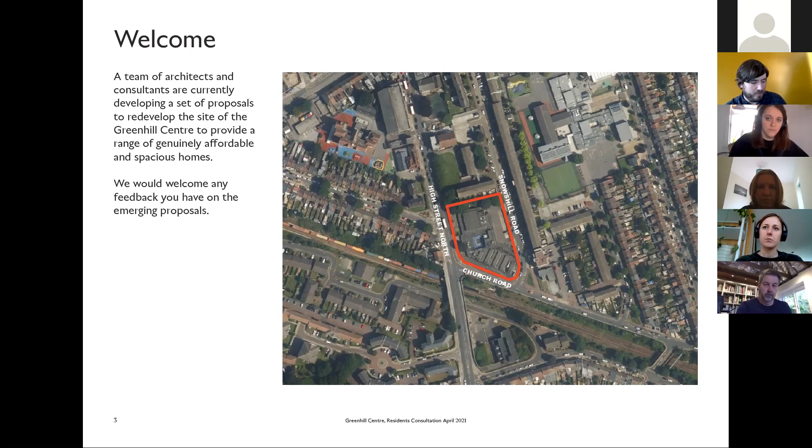Before I pass you over to Harriet, I'd like to explain the wider team. It's a Newham Council-led scheme, and I'm an employee of Newham Council. The architects are Haworth Tompkins, the landscape studio is ME Landscapes, and not present today are structural engineers, Graphic Structures, helping us with the design of the scheme, and mechanical engineers, Max Fordham.

The scheme will be a low energy passive house design building. Max Fordham are helping us design that, and Potter Raper will be providing project management and cost consultancy advice through the project. I'm going to pass you over to Harriet and Laura from Haworth Tompkins, who will take you through the design of the project.

Thanks, James. So as we've mentioned, Harriet and I are from Haworth Tompkins Architects. We're an architecture practice based in North London. We work across many sectors, including the theatre and performance sector, education buildings, and also residential buildings for both housing associations and private developers.

This example here shows one of our projects for Peabody in West London. It's a brick building which knits itself into the surrounding context. It has a mixture of inset and projecting balconies, and it ranges in height from 4 stories in some places up to 9 stories. We think this is a really good example of a project we've delivered, and the type of architectural quality and brick detailing that we hope to bring to this scheme at the Greenhill Centre.

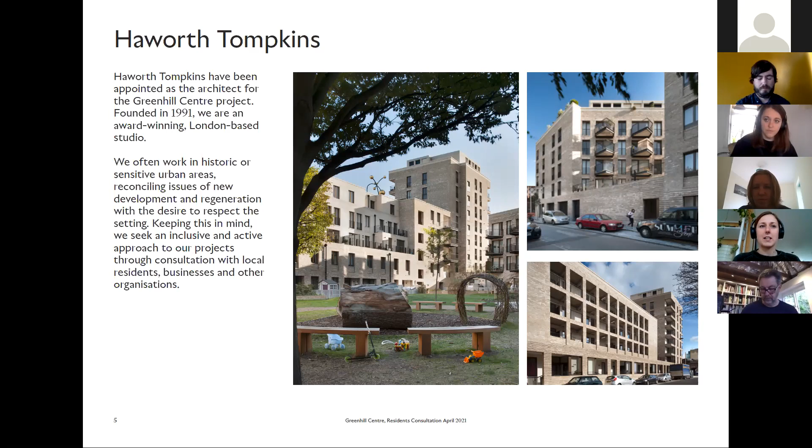Hi, I'm just going to run you through the site and our proposals. I'm assuming the majority of you know this, but the site's located just south of Manor Park Underground Station, and there's also Woodgrange Park Overground Station to the west of the site, and also a number of bus stops along High Street North and Romford Road.

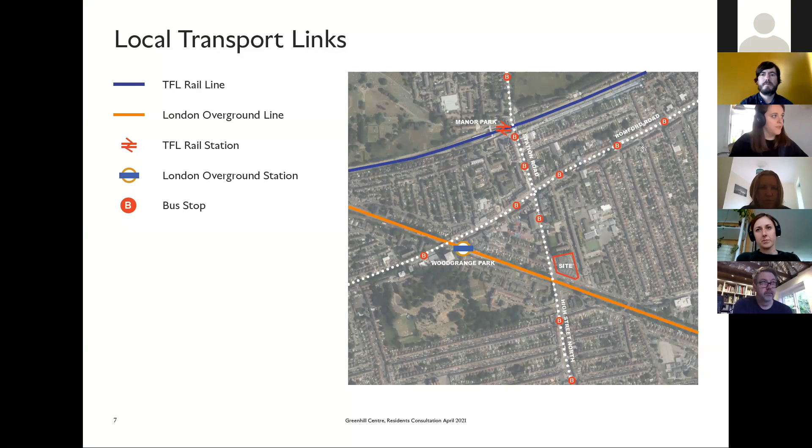The site today, as James mentioned, has the existing Greenhill Centre on it, which has a number of functions: the gym, the boxing club, GP surgery. James has explained that the GP surgery and the boxing club are being re-provided off-site, and we are re-providing the gym within our proposal.

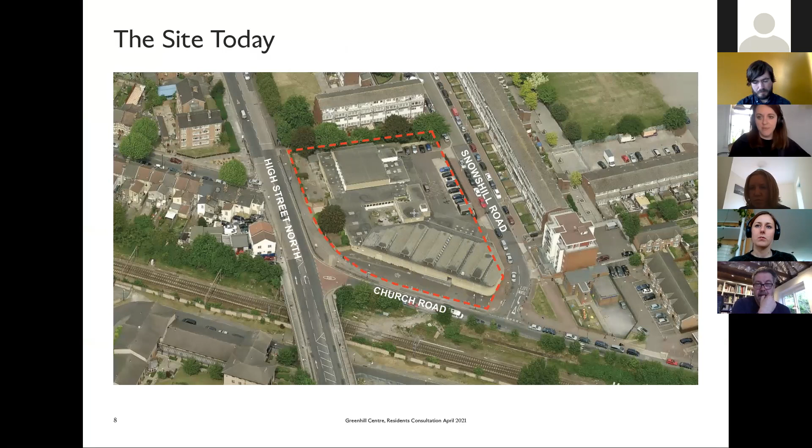The site's bounded by 3 quite different roads. First we have High Street North, which has a number of locally listed and listed buildings on it. You can see when you get to the Greenhill Centre, the existing building there, there's quite a lot of blank brick facade. So our proposal will be looking to reinstate something that contributes more to the high street.

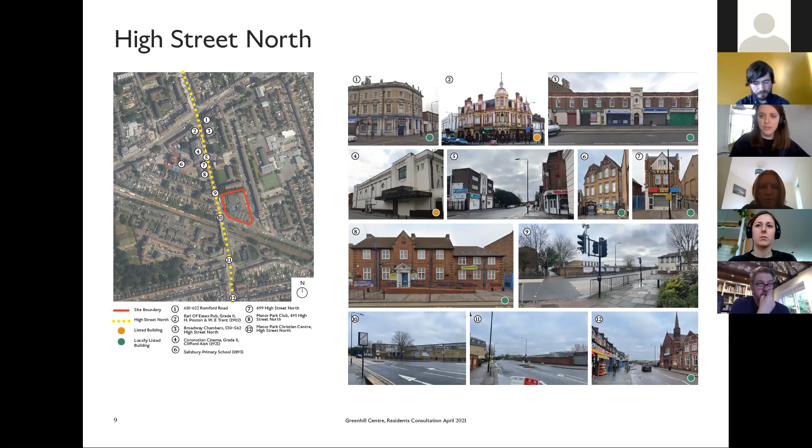We've then got Church Road, so the road slopes around the corner, and it's bounded by the railway line. You can see at the moment, again, the building doesn't add anything to the streetscape. There's quite a wide, large patch of unloved pavement and then a very blank facade. Our proposals will be looking to create an active frontage onto this road, and also landscape some of this pavement and add new trees, which Mike will explain in detail a little bit later in the proposal.

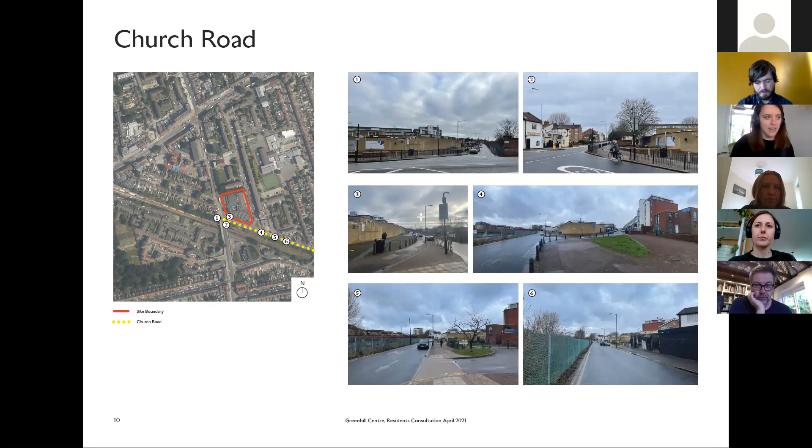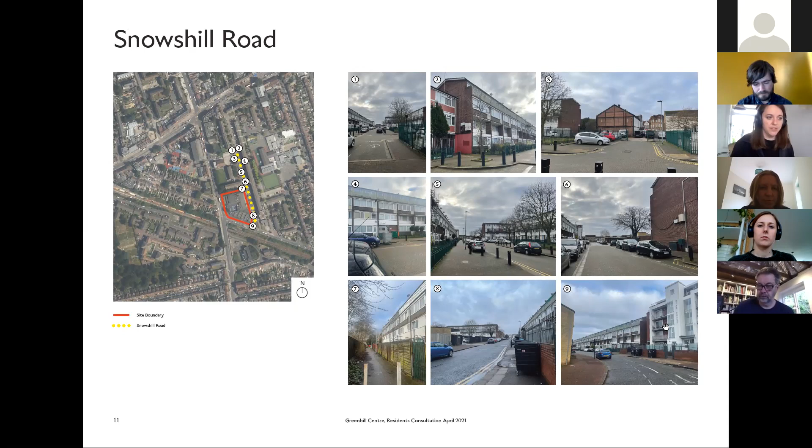Then finally, going around the corner again, we have Snowshill Road, which is a quieter residential street, which has this row of 4-story maisonettes on it. You'll see from our massing and our proposal that we've stepped down our massing to respond to the quieter residential nature of this road.

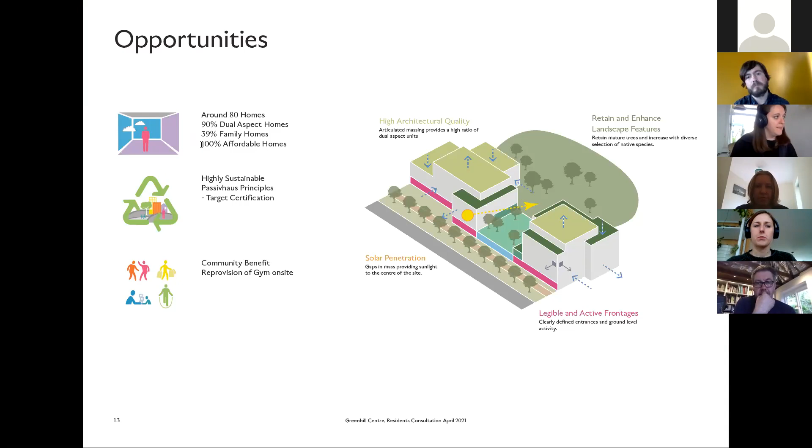So the opportunities for the site and the brief that we've been working towards with Newham Council: we're looking at around 80 homes. 90% of the homes are going to be dual aspect. 39% are going to be family homes, so 3-bed and above. And 100% affordable homes—as James will explain in more detail, that's 70% London affordable rent and 30% shared ownership. We're looking for a highly sustainable building, targeting Passivhaus principles, and also BREEAM excellent for the gym, which we are re-providing on site.

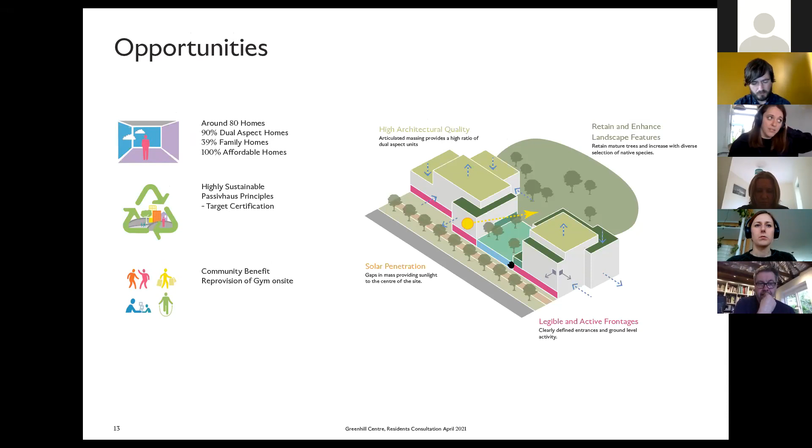There's a number of factors to consider when we initially started looking at the site, and our proposals have taken all of these into account: things such as the existing mature trees on site, which are quite lovely large trees that we wanted to keep, the noise pollution from the high street and the railway, the existing neighbouring properties and ensuring our building isn't getting too close to them. We've also marked on here the existing vehicle entrances, and we'll just be keeping this one to the north to minimise traffic disruptions on Snowshill Road.

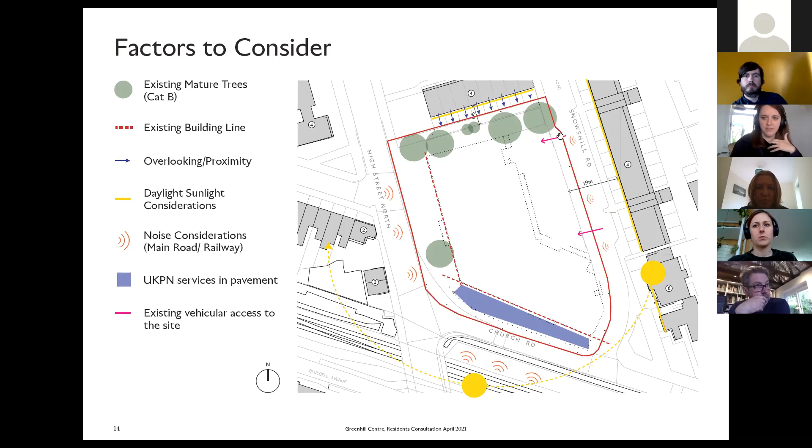So this is how we developed the design. As I mentioned, we wanted to keep all the existing mature trees and use these to enhance the proposed landscape. The residential courtyard for the new residents in the centre of our scheme is protected by the surrounding buildings. We've got active frontages from the gym and from residential at street level, which will improve the streetscape compared to the big blank facades of the current existing building. We've got residential through-cores, so when you walk past the building, you'll glimpse into the landscape in the middle. For servicing and parking, we're using the existing vehicle entrance to the north of the site to minimize disruption. And then the orientation, height and massing.

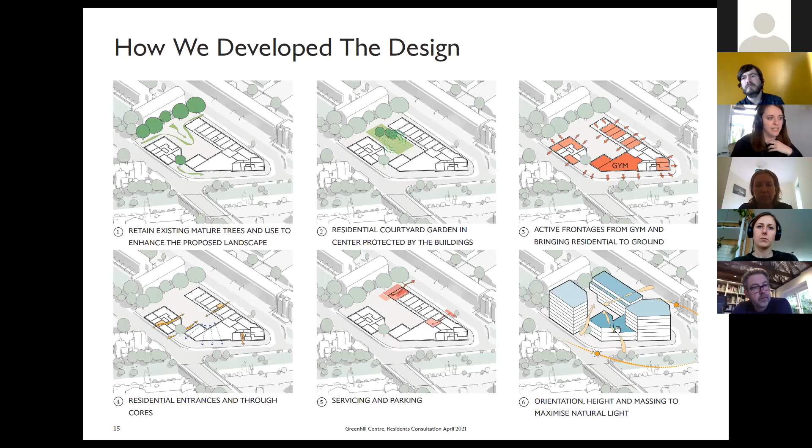We've been working hard to develop the scheme to have the lowest impact possible on surrounding neighbours, whilst also trying to create an enjoyable place to live for the new residents, especially with enough light into the communal garden.

The development will be car free, in accordance with council policy, meaning new residents of the 80 new flats will be unable to apply for parking permits. However, there will be 3 accessible car spaces on site for new residents, and parking permits will be reserved on street for existing residents in the area.

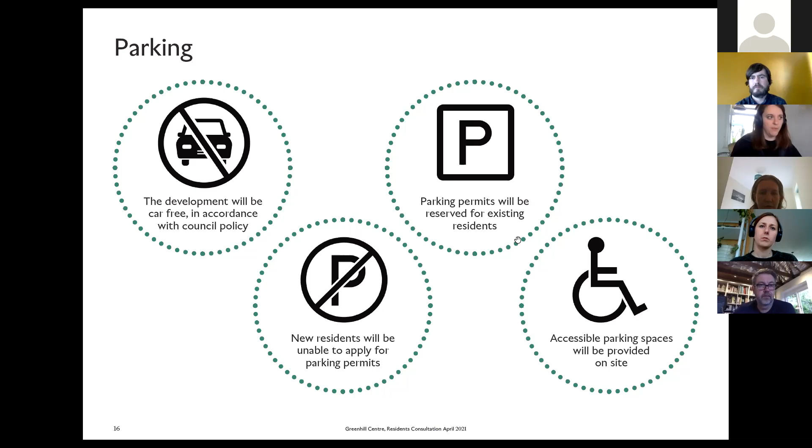These are our finalised proposals following previous residential consultations, as James mentioned. We've got around 80 homes, a large number of family-sized homes, so 39% 3-bed properties, a communal garden in the centre, and improved landscaping not just on our site but spreading to the surrounding areas, which Mike will go through in more detail.

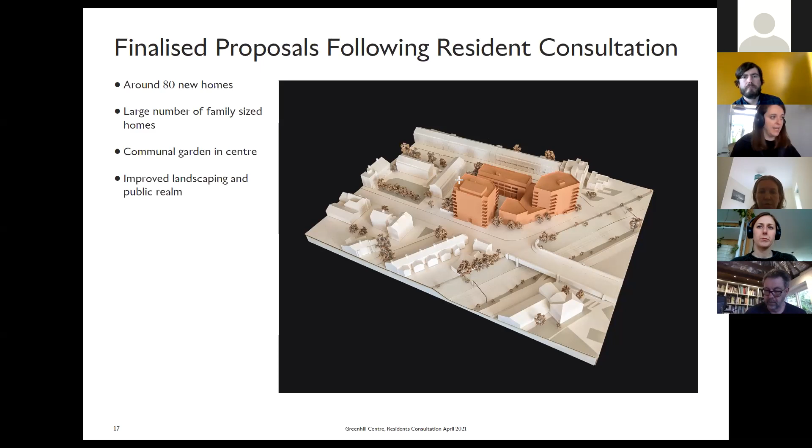This is a zoom in of the ground floor plan. So a few things to note: there are 3 main pedestrian entrances highlighted by these blue arrows, this is the entrance to the gym facility, and the smaller arrows show where there'll be individual access to individual maisonettes.

The maisonettes on Snowshill Road, for example, are similar to the pattern of maisonettes on this street. We also have the 3 accessible spaces that you can see to the north of the site.

As part of the car-free approach, we're going to be providing a lot of cycle storage for residents of this scheme, so there's a large proportion of cycle spaces provided, and then there'll be some additional cycle storage outside the gym for gym users.

The green and blue locations just highlight where we have refuse stores and plant. And then the pink and yellow colours are - the yellow is the gym and the pink is the residential properties.

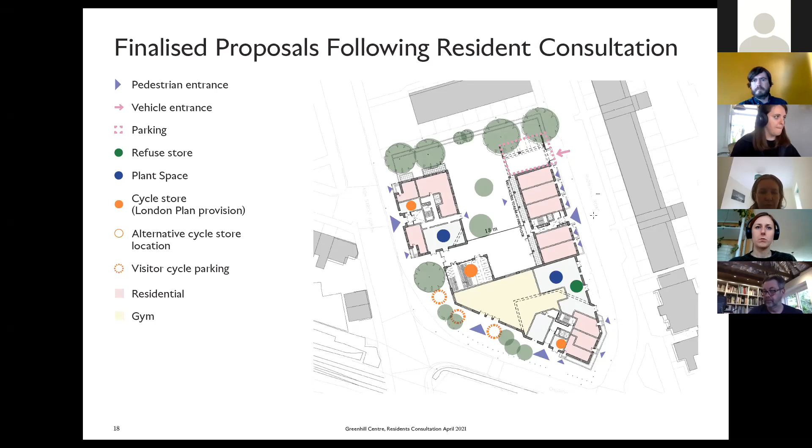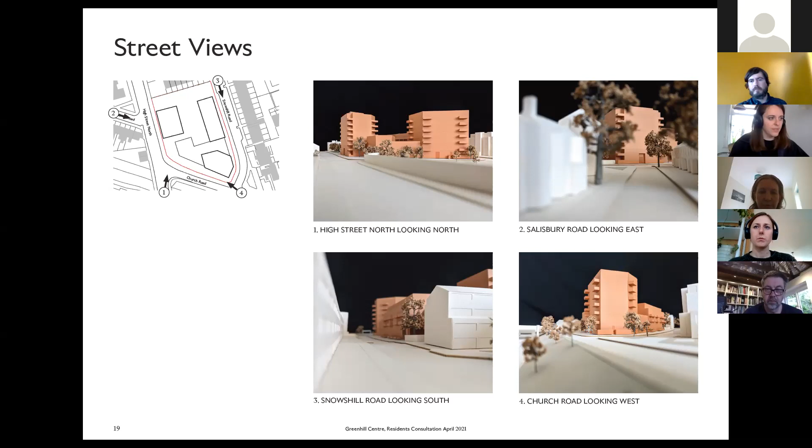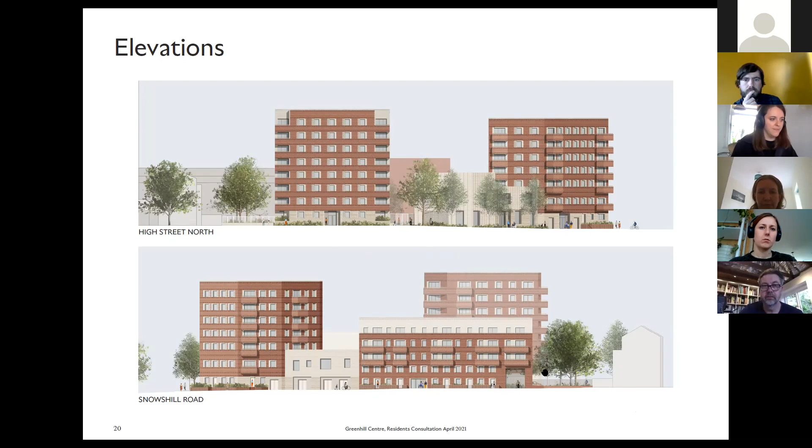And then this is zooming around the corner to the Snowshill Road elevation, so you can see here the individually accessed maisonettes with the flats above and the car entrance for those 3 accessible spaces.

I'm now going to pass you over to Mike, who's going to talk through the landscaping. Thank you. Thanks, Harry.

So the first slide is just about the existing Snowshill passage, and we're looking to close the passage and make improvements to the existing passage that is just further to the north on the other side of the existing maisonettes.

We're looking for entrance access for the existing maisonettes into the communal garden, so that there is access for the residents of those maisonettes. And we're also looking, as part of the improvements to the passageway to the north, at a play area, which is just to the western side of the existing maisonettes.

And we've also been discussing with local groups in terms of how our landscape proposals for the site dovetail with other works that are being carried out in terms of environmental improvements further to the north of our site. So that seems to be coming together.

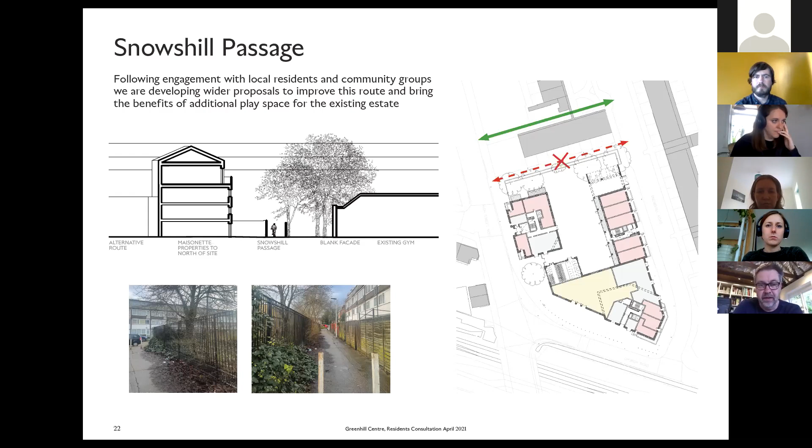On here you can see the communal garden, where the northern strip retains the existing 4 category B trees and provides additional planting as well as seating areas.

That has more of a natural focus in terms of native plants, meadow area, and additional tree planting. Just to the north of that is the play area that we're developing, at the entrance to the passageway there.

There's a number of existing trees in this area, which we're looking to retain as part of the works in that space. Working down through the communal garden, you can see there's some raised planter areas with fruit trees and grow-your-own planting.

So residents can grow their own produce. Further to the south from there, we're looking at the play area for the site. We've done child yield calculations based on the Mayor's London plan guidance and the planning guidance.

We're looking at providing play facilities for 0 to 11-year-olds with a range of facilities, including natural play elements and also play equipment, in a contained space which is safe and easy to use.

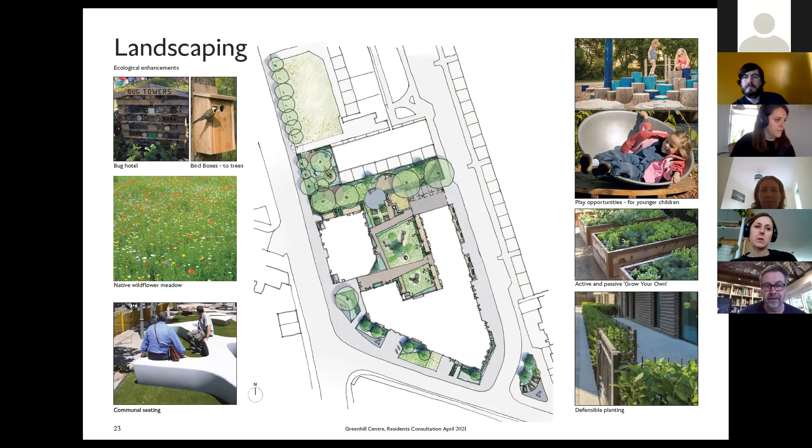Also providing communal seating areas as well, so that there are spaces for people to use in different ways - quiet, more passive spaces, then more active spaces for parents and carers related to play facilities.

And then just some additional images showing the types of play, again with a range of characters to that, and then also biodiversity ideas.

We have quite extensive green roofs as well on the buildings, trying to diversify and provide ecological habitats for different species on different roof planes.

So we then start to get the landscape rising up from the ground plane up onto the building massing and onto the roofscape of the buildings.